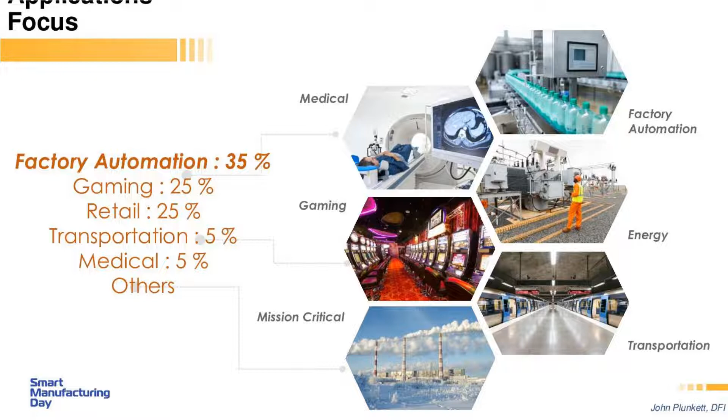Factory automation is still the biggest segment of the industrial and embedded computing space that we deal with. I just wanted to quickly point that out - it's a very fast growing area. Like I said, we're the baseline infrastructure for areas where people typically don't have the expertise, and we can provide that to make sure you have the best implementation possible.

So I want to go through some diagrams. Here's a general diagram of what you would see in a typical application. As I've mentioned, you've probably already either developed or sourced the application, figured out the types of connectivity you need, whether that's going back to a server room or direct access through a gateway on the shop floor. You've figured out all the sensors you need on the right side here, and you have an idea of the base computing platform your applications are going to work on. Basically, you can think of this blue box as the hardware that enables all of this to work together.

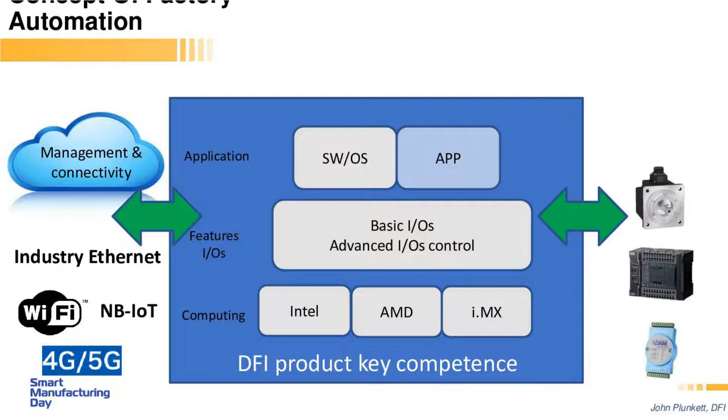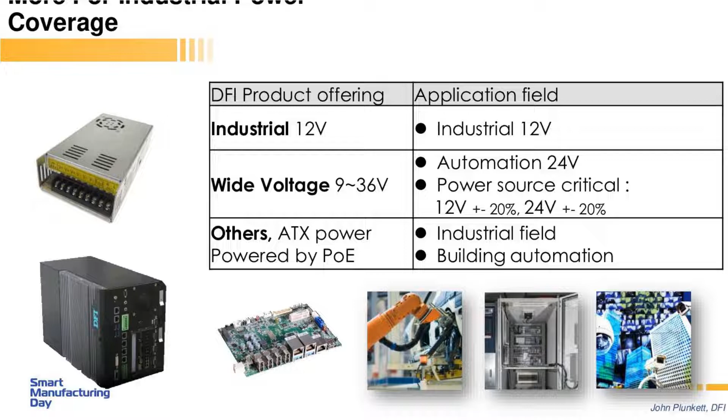So what are some of the things we could provide to help implement our systems into your industrial automation environment the best way? As I mentioned, they're industrial, so they support DC voltages, either industrial wide voltage. We can also support 48 volt DC, but that's typically for telecommunications. We can handle whatever power requirements you have for the system, so that's not an issue.

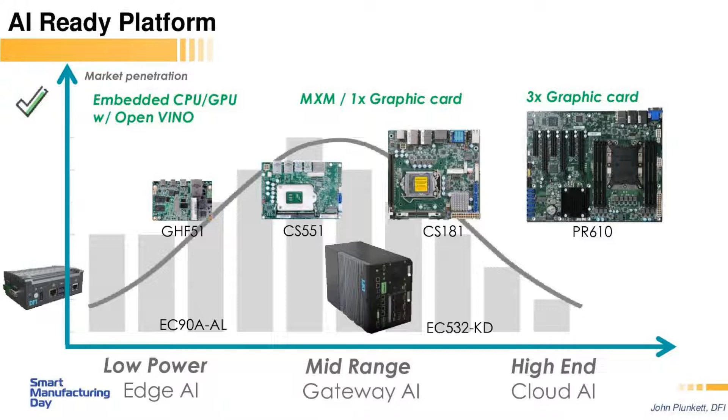Here's an example of the range of products we have. If you're in a very edge application, we have very small form factor boards - this board is actually only 1.8 inches and can go into a super tiny box. And then we can go all the way up to a server class motherboard type of situation where you could install FPGA cards or multiple graphics cards for that computational power we discussed before.

So I'm going to go through some examples of implementations to give you ideas of how you can implement things on the shop floor and implement your system. Here's a basic idea of the different functionalities you might need an industrial PC for in this environment. It could be for controlling a robot or an automatic vehicle, it could be just a gateway for remote management or data upload, or it could be a device that does the computing and logs data or machine vision. All these functions within the industrial and automation environment are things we can provide systems to support.

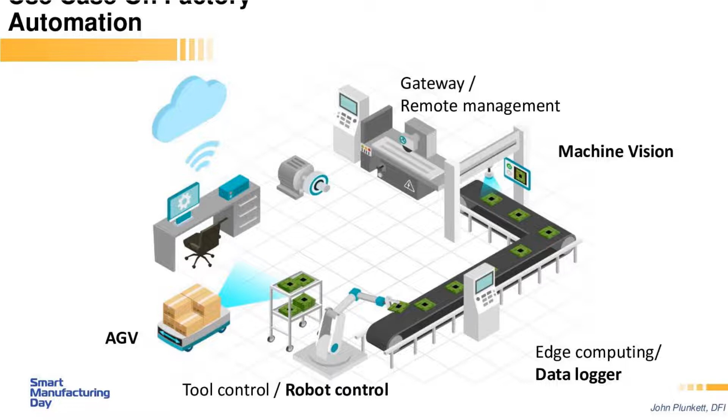Here's a simple example of a data logger. You have a server with our unit in the middle, which can transfer data to your server environment over Wi-Fi. Here are the sensors, and we can provide connectivity out to those sensors. You can also have a flat panel to provide control on the shop floor. This is an ARM-based application, so that's just one simple block diagram to look at.

If you wanted a machine vision system, we have larger systems that can support a full-size PCI Express graphics card, has GPIO, can run DC voltages, and can interface to whatever type of camera you have. So that might be another example.

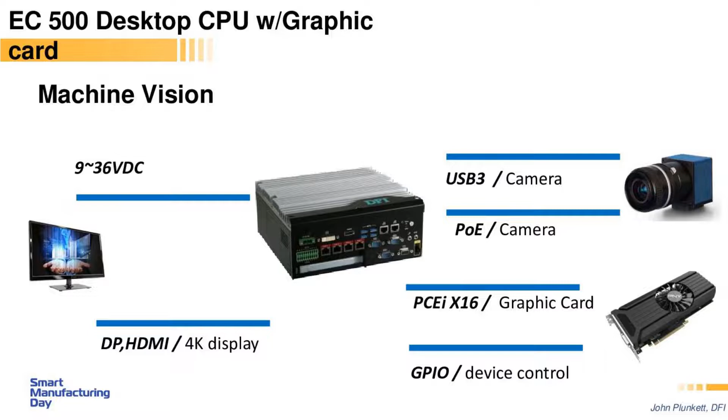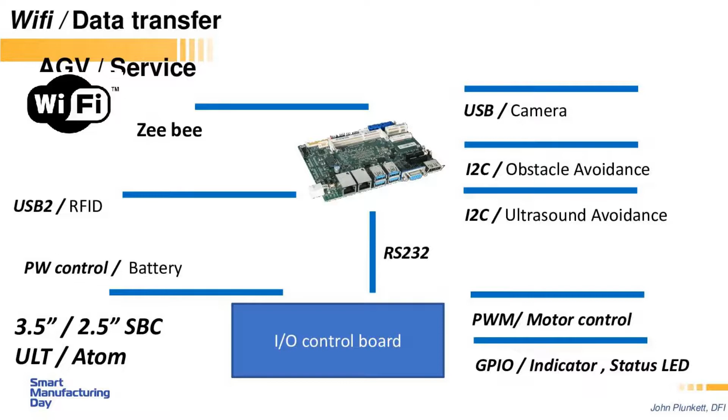This is still actually a really small box, basically just big enough for the video card, but we can support any form factor. If you wanted to do just data transfer or control a vehicle, our baseboards will have all the connectivity you would need to support whatever function you needed to control within that device.

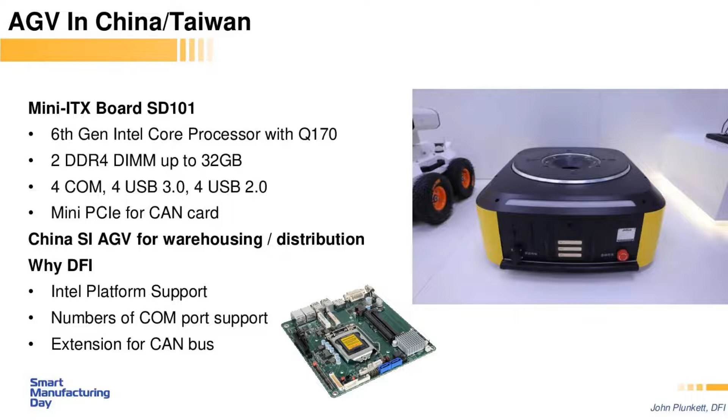Here's an example of one of our boards that went into an automatic vehicle. We used one of our mini ITX motherboards, an Intel-based platform. Some of the special features they needed was a significant amount of COM ports and USB ports, so we were able to provide a solution tailored exactly to run the software within the vehicle that they needed.

Here's a service robot — again, this is a 3.5 inch SBC. Part of the big takeaway is that we support a huge amount of form factors, and oftentimes the robot or the device or the machine you're using already has most of the design, and you need to figure out a way to fit a PC in there that will also support the environment.

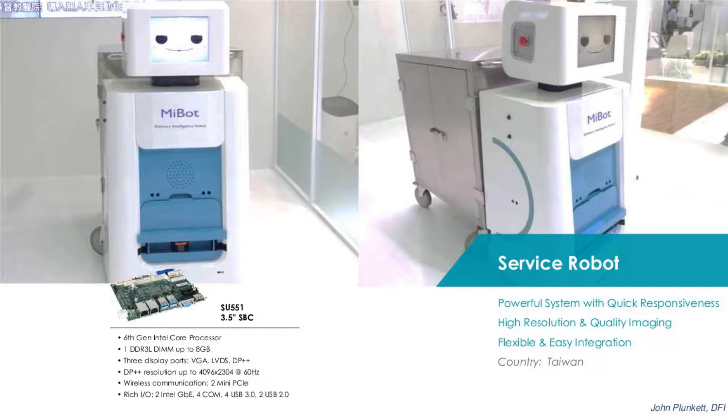Sometimes that's very limited in space or has very high temperature or humidity requirements, and we can find a solution that will support all that, providing exactly the right solution even if the person didn't necessarily consider those factors up front.

Here's an example where we use a Q7 module with a baseboard that would run into a robotic arm used to teach people how to use this type of equipment. It was in a very harsh environment, so it was ruggedized for shock, vibration, and temperature.

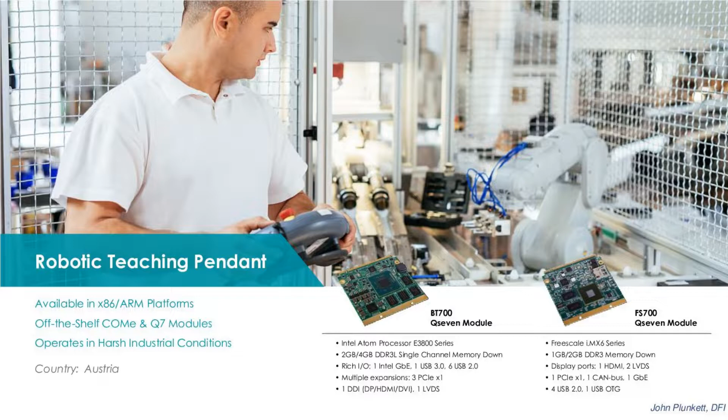Here's an example of a robotic system. This used a COM Express module. The advantage of COM Express modules is that the main computing aspect goes on a separate board, which plugs into a baseboard. If this unit were to fail, or if you just wanted to upgrade the system, you can unplug this one module and stick it back in. So it provides field replacement capability as well as future proofing for additional power down the road.

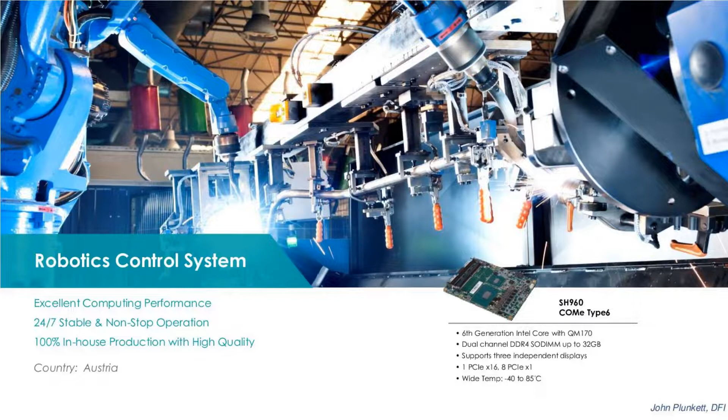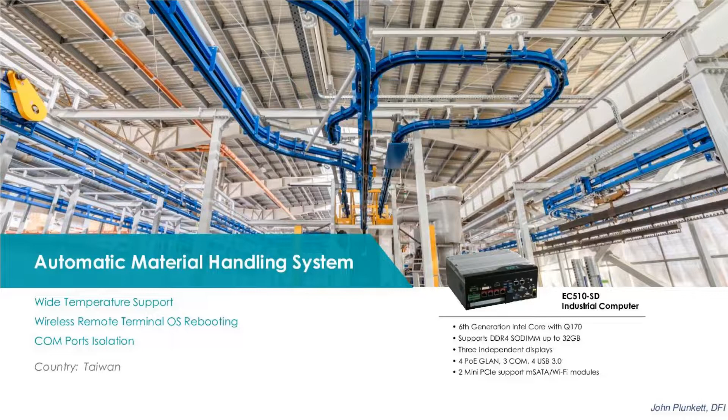Here's another example where we had a high temperature environment for a fully automated material handling system for a factory. That used one of our embedded systems — one of our boards inside here — and we can tailor the I/O connections to your application for that example.

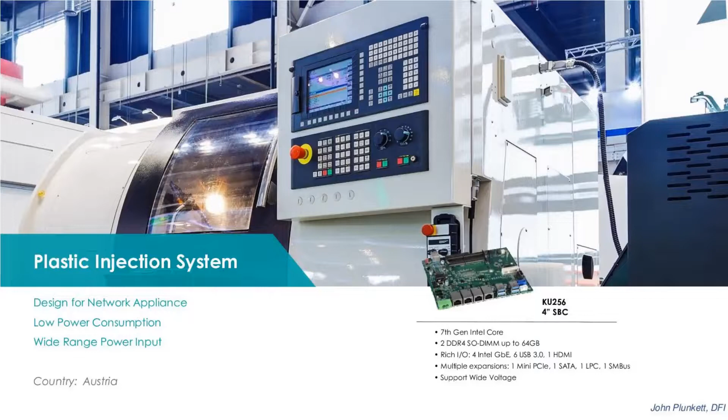A lot of these are similar, so this is just another example — a molded robot, a plastic injection system.

We can also work in very, very harsh environments where there's lots of shock and vibration. This was a vibration analyzer that used a very high-end PC with extended temperature tolerance, additional resistance to shock and vibration, and still had a lot of I/O.

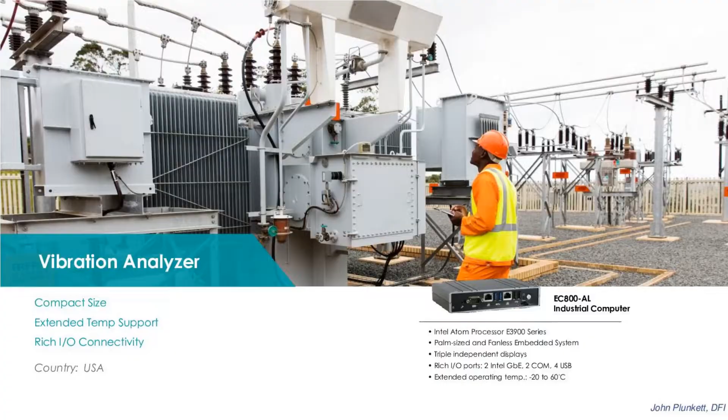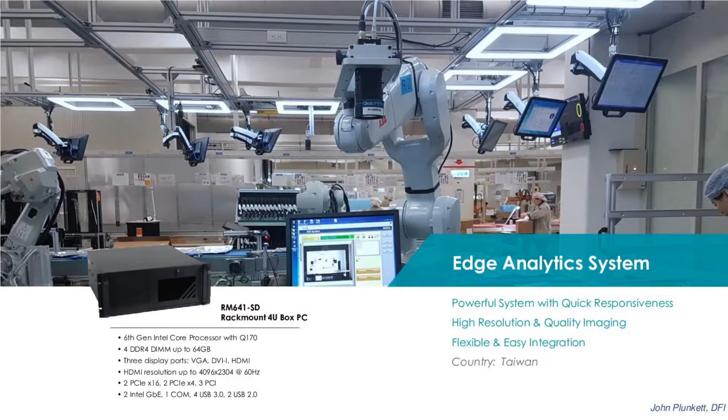Here's an example of an edge system just using a standard rack mount computer, which is still available. So if you have that type of space and system, we can support that type of environment as well.

Basically, whatever your computing needs are for the base platforms to run your software, we can provide that. We have a very wide range of horizontally oriented base products that will fit into most applications depending upon your environment, the form factor you can support, the capabilities you need, and your I/O requirements.

But we also can do very customized systems. About 50% of what we sell has some level of customization, ranging from just changing the I/O ports or small modifications to complete ground-up designs. So we provide the glue at the very entry level of an automation system, and we can tailor whatever solution you need so you can take what you've developed and put it onto the shop floor. With that, I'll finish, and I appreciate your time.